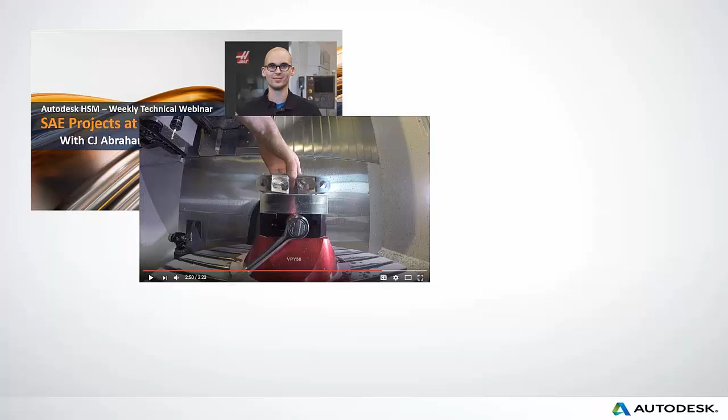A lot of the webinars started with CJ doing a QA session and answering questions people had, like how to set up the part and how he got some of the toolpaths working. He also joined us later on with other webinars and showed us different ways of doing work holding.

Here's his last presentation with us, a pretty cool assembly he did of that DMS machine at Pier 9.

If you haven't followed him on Instagram, I highly recommend checking out some of the projects he's worked on. Some pretty amazing setups he's done on the parts, and this is just scratching the surface.

CJ did an awesome job with us on our presentation, but one of the themes was how he did a lot of those setups. What were some of the questions on the soft jaws? How did he set up that part? We also had Tim Paul, an amazing machinist, join us.

He set up a lot of parts in Fusion and runs them. He joined us in a couple of our webinars as well to walk through how he sets up some parts.

He did the Matsuura belt buckle, which is amazing—I still want to get one of those. He had that set up on that Matsuura machine, as well as the bottle opener.

I still have one of these and use it all the time, but he did a great job setting that up, did some soft jaws, had it in a live demo, and was able to do it at demo days.

If you check out his Instagram channel as well, you'll see a lot of the setups he does every day, and check out some of his work there.

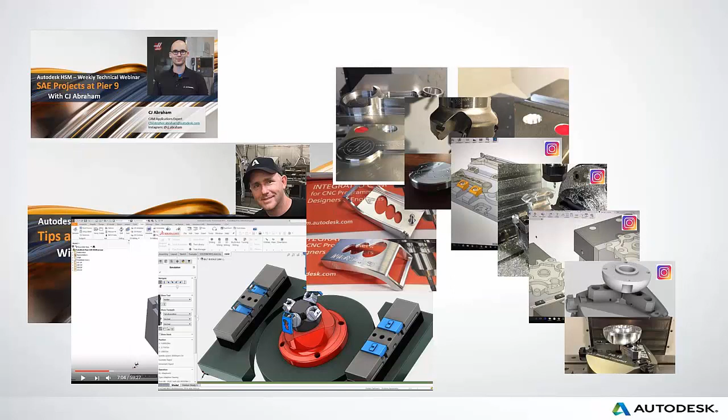It's just amazing. Another part of these webinars is the question of how you work with some of those models, and a lot of people have asked for those models to work with.

We had Angelo Juras join us in one of our webinars specifically to talk about setups and work holding, and he talked about some soft jaws.

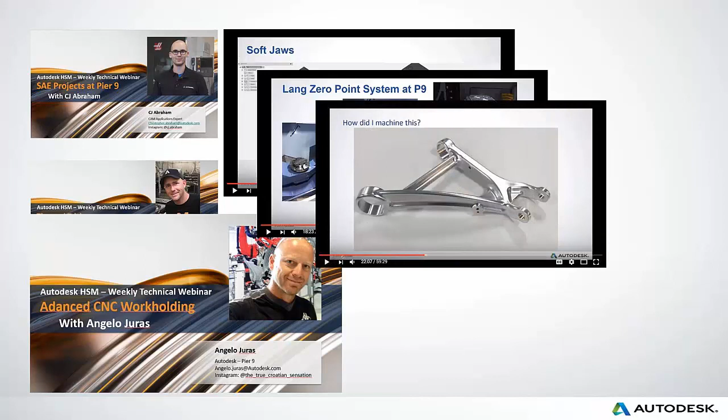He went through different ways he did setups to save time and make things much more efficient. For parts like this, how would you make something like that? He showed how he simply did it with just a few setups, used some tabs, and was able to do an amazing job setting it up.

Other parts he worked on looked like they'd be pressed parts, but he was able to machine them using specific setups he worked out on the machine.

Again, check out his YouTube channel and also his Instagram channel, and you'll see a lot of the setups he does daily as well.

So I'm just going through some of the webinars we've had in the past that were really focused on work holding, setup, and machine setup.

John Saunders joined us and walked us through some amazing points on what to look for if you're new to CNC machining or have a new machine, things to look for when setting up your parts.

We've also had Lawrence Winshank join us, and he was able to walk through some of the setups he uses on his machine.

Just a few weeks ago, Sunny McCullough was with us and talked about some of her curriculum and what she did to set up a custom handle for a vise, as well as how she teaches her students to make soft jaws before they move on to the next section in her class. So these are just a few that we've done, but a lot of them talk about work holding, tips and tricks that come from these experts and people who do it every day, power users and the Jedi Knights of working with Fusion and working with CAM.

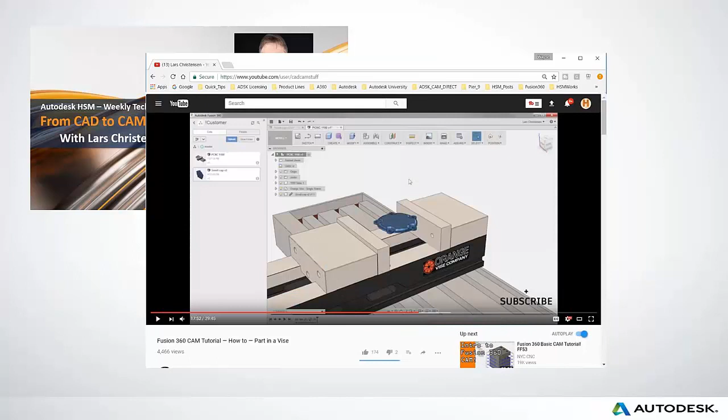Really good interface to learn. I highly recommend going to Lars's website and taking a look at some of these videos. Check out his YouTube channel as well. Check out his Instagram channel too, because he updates it almost daily with great tips and tricks on how to hold your parts, how to run those toolpaths, how to set up working on the Haas. Some really great tips on positioning and being able to get the toolpath efficiently to cut the parts you're looking for. So I highly recommend checking out his Instagram channel as well.

So a couple weeks ago we had Curtis Chan join us too, and we're talking about that Instagram community. We have some great users out there that show us daily what they're making and some of the amazing setups that they do. And we had Kurt on with Phil Butterworth, and Phil walked us through some amazing setups that he's worked on as well.

Before we get into that, I want to talk about the Instagram challenge that Kurt started — as he's connecting with that community on Instagram, he's also started the Fusion CAM Challenge this year, and it was all about work holding.

And I'd like to congratulate Makers Inc. for this amazing work holding submission that you did, which won. Really awesome way to set up a part, completely designed in Fusion, all the way through, design documented, all the way through to making the physical part. Congratulations, Makers Inc. They got an Orange Vise as well as the CarveSMART package and a free ticket to AU.

And runner-up was Phil Butterworth, who was also on this webinar with Kurt, and he did an amazing swing arm assembly, completely done in Fusion, all the way from the concept to design to being able to make the actual part.

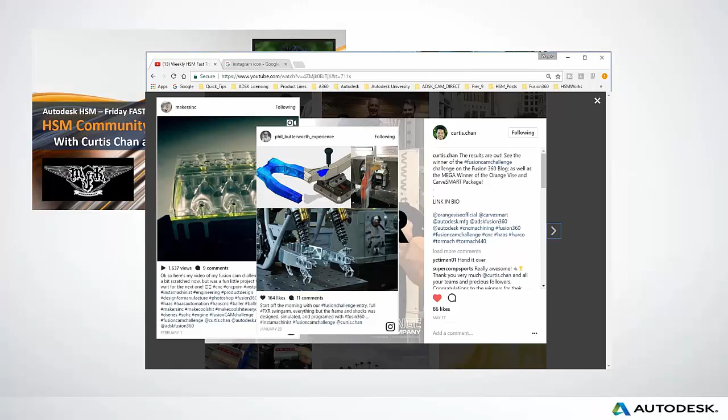Really awesome job. Third place was Regal Metalworks, who made this custom exhaust for a Porsche - amazing job producing those parts. Fourth place was Innovation Forge, who made some amazing woodworking fixtures as well.

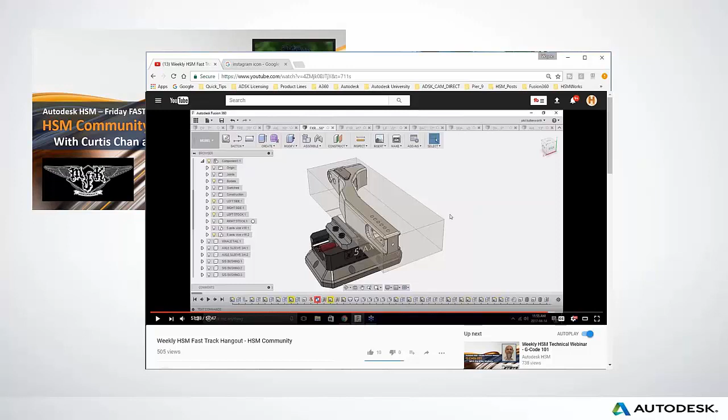Phil Butterworth was part of that webinar with Kurt, showing innovative ways he set up these parts to be made, including interesting ways to avoid collisions and get into tricky places on the parts. He gave great background on how he set up some parts using the dovetail to access all those different nooks and crannies in one setup.

And also some other custom setups to set up those parts. So I'd like to get started now, but I know there were a lot of new users asking how to set them up. So I'm going to take a Chick vise.

I'm going to download a Chick vise and upload it into Fusion. Once we get into Fusion, I'm going to turn it into an assembly where you can move the jaws back and forth.

Then I'm going to design a simple part - actually a sprocket with a hub, but we're mainly going to focus on the hub part. I just want to model it up quickly to show you how you can work with pockets using parameters to change them.

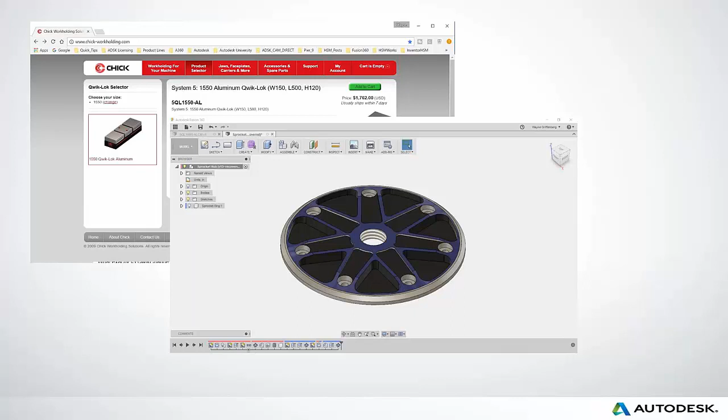Then we're going to bring that part into the vise, set up some soft jaws, and walk through those steps - hopefully this will be helpful for you, since I know there are a lot of users still learning these steps. So as we go through, please feel free to ask questions.

I know Matt Nichols is on with me - he can help answer some questions, and I'll do my best too. So I'm going to get started, bring up my Fusion and my web browser. I'm using Google Chrome, and I'm just going to go grab a Chick vise.

I'm going to search for my Chick vise - looks like I searched there earlier when I was practicing. I'll go into this Chick Work Holding Solutions page and download a Chick. Now you do have to sign in - I'm already signed in, but you create an account so you can download the different vises.

You can download Kurt vises, the Mitee-Bites, 5th Axis vises as well, and work holding fixtures. So I'm just going to walk through the Chick one today. I'm going to look for a product, get the Qwik-Lok, and use this 1550 today. I'll select the 1550, which enables me to download some files.

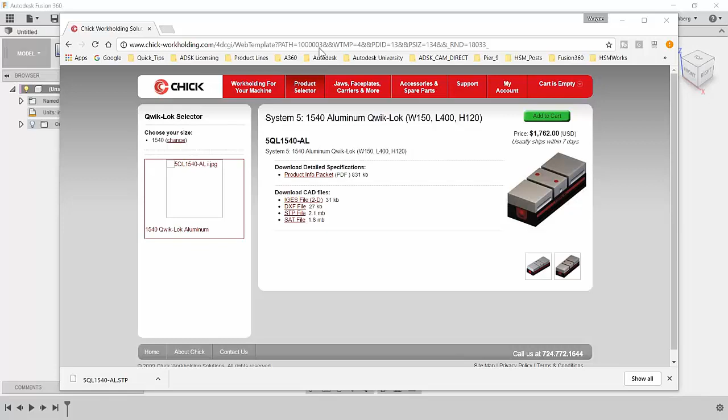I like to work with IGES or STEP - today I'm going to work with STEP, since it seems to work best when bringing it into Fusion to make an assembly. So I'm going to download the STEP file - takes just a second. And there it is, downloaded into my downloads folder for me to upload into Fusion.

So I'm going to go back into Fusion, into a project we're working on today - this Fast Track to CNC Programming folder. I'm going to go into this project and upload it there.

I'm going to click Upload and select the file. Now, some of you may not know, but there are a lot of different files you can upload into Fusion - native files, native SolidWorks files, STEP files, STLs, Rhino files, native Pro-E files, Parasolids, different binary files, IGES, CATIA native files, as well as Inventor files.

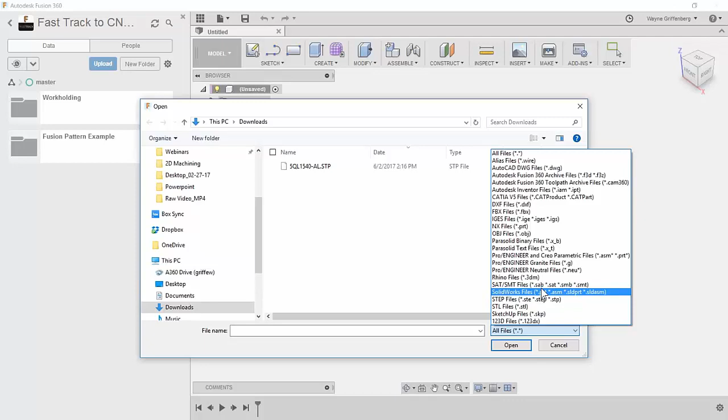So there are a lot of different files we can upload, especially native files. And just to let you know, if you upload a native file into Fusion, you can keep that original file, and if any changes happen to it, you can upload those changes into your design as well. So in this case, I'm going to open this STEP file and say upload.

And in the background, in the cloud, it's going to upload that file and translate it into a Fusion F3D file that we can work with. So as that uploads, I can close this out, and I can see the progress down here in the corner. So it looks like it uploaded. It's finishing the progress.

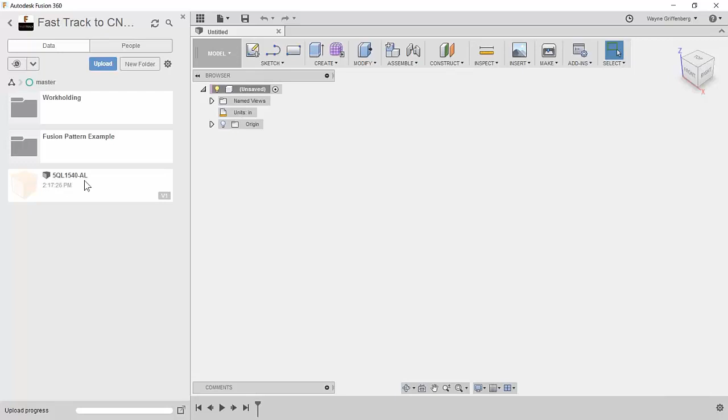So pretty quickly, I'm able to get a file in here, a version 1. It's now a Fusion file. So I'm going to open that up. Just going to right click and open it up into Fusion. Okay, so there's our Chick vise. It looks like it's in a different position than what I'd like. So I'd like to rotate it around. I want to have it in position as if it's in my machine.

So right now it brought in all these files. Now STEP files work pretty well in bringing in each of the components with its own origin and body. And that's pretty good. Sometimes you'll open up different files, even SolidWorks files or Pro-E files, and they just become standard bodies that make up the whole. And we can also work with that as well. But today it looks like the STEP file brings us different bodies that we can work with.

But I'm going to move them all at the same time. So I'm going to select some of these bodies. I'm going to move them. I'm going to hold Shift, and I'm going to grab the bottom one here in my browser. What I'd like to do is rotate this around so that its X, its Y, and Z match the way it's set up in my machine.

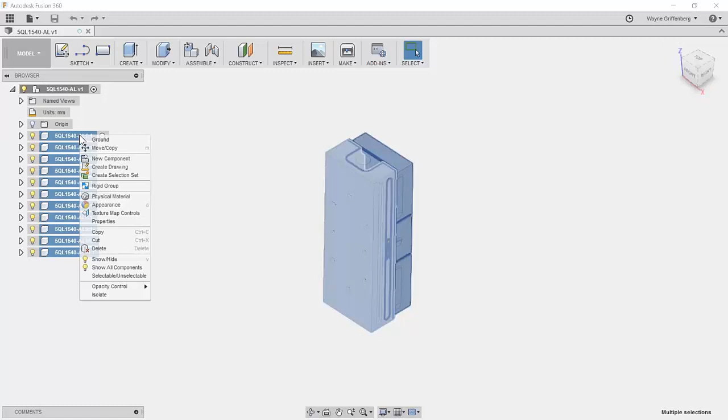So as I have it highlighted, I'm going to right-click on any of these files, and I'm going to say Move or Copy. So I have these handles where I can rotate the handles, or I can move it back and forth, or I can grab the origin and free move it. So I'm in the free move mode. What I want to do is grab this handle and flip it down this way, 90 degrees, so now it matches the way it's sitting in the machine in the Y and the X and Z. So my X is going along this plane, my Y is going up here, and my Z is straight up. I'm going to say OK.

Now one thing I noticed too, if I turn on the origin, it looks like the origin is on the bottom of the part, somewhere on the inside. What I'd like to do is get that origin to be at the very top of this plate right here. This is the fixed jaw plate. So I can move the part from the fixed jaw plate down. Now, actually let me change this over from millimeters to inches because today we're working in inches, so I don't forget.

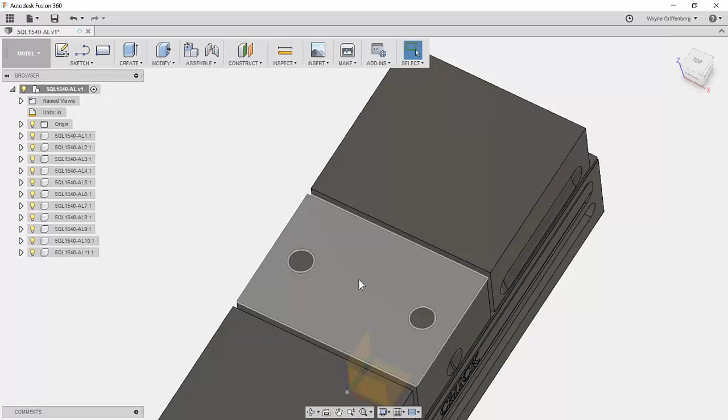So I'd like to move that, but right now I don't have any features on the top of this jaw. Normally I would like to have a dowel pin hole where I can come in and probe off and find that center and call that my G54. In this case, I don't really have anything there. I don't really have to draw anything. All I have to do is create a sketch on that face. Okay, I didn't do a create, so I'm going to right click, create a sketch on that face, but I don't have to add anything. I'm just going to stop sketch. Just a little bit of a tip.

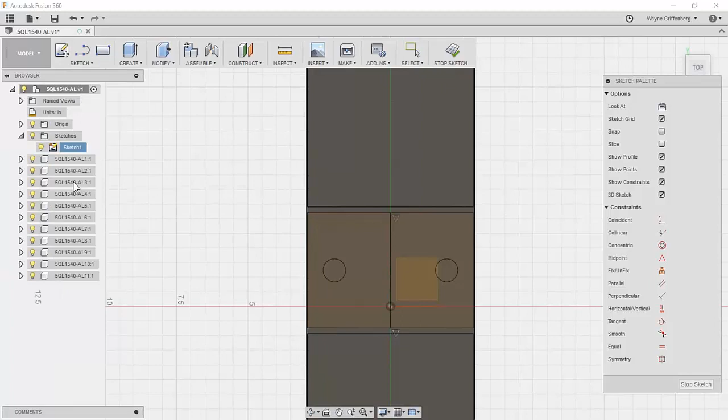Because I created a sketch and it found the boundary of the part, it also put a center on here somewhere, or it's making a liar out of me, but often you'll be able to find a center on that sketch. If not, I can also add a line going across to put a center on that sketch. Let's do that. So I'm going to edit that sketch real quick, and simply draw a line from the center here down to here, and then we'll have a midpoint of that line to hook to. Sometimes you can also sketch and put in a simple point right in the center. Now we can use that point to move this vise. Now that's just one quick way.

Sometimes I'll actually make a hole there, but sometimes you just have to put a sketch so you can move this around. Later on when we move it, we can get rid of that sketch too. So I want to move this part. I want to move it to that center point right there. So I'm going to grab all the bodies underneath it here, again holding shift, right click, go back into move, and this time I'm going to change it to move point to point.

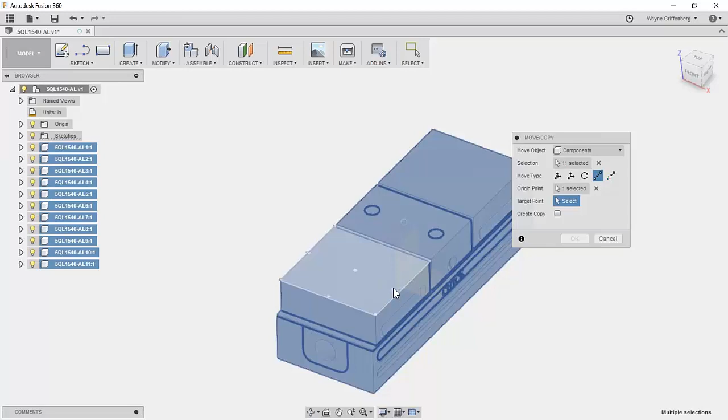And where do I want to move? I want to move this point to the origin. Now I can't quite grab the origin underneath of there. Sometimes it's a little bit hard. You can use a shift key. I'm going to expand down the origin and just simply click it here, and it moves it down to the origin. So you can actually grab the planes, or you can grab the axes or the origin right in the browser window. So it moved it down.

Okay, I don't really need that sketch anymore because now I'm going to be fixed in that position. So now what I'm going to do is I'm going to get rid of that sketch. Right click and just delete that sketch out. I don't need it anymore. Okay, so now what I want to do is I want to fix these components that are supposed to be fixed, the ones that don't move.

So I'm going to select those, holding Control. I'm going to select those components out of a list here on my browser. So I'm going to grab that plate, and down here, that's the fixed jaw. This is my moving jaw, my other moving jaw, and then I have these other fixtures of the labels as well. So those are the components that I don't want to move. I want to be able to move these moving jaws right here.

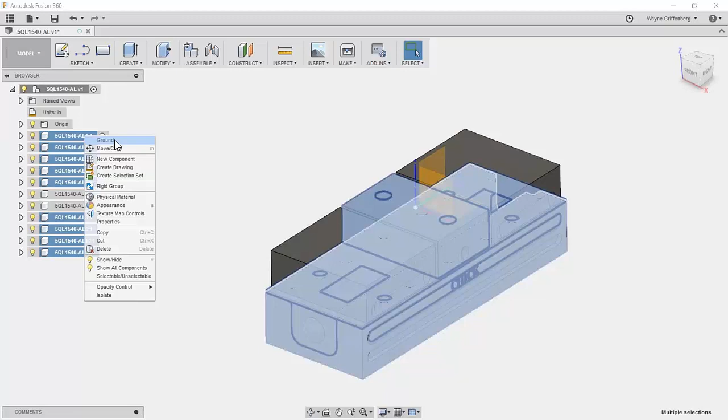So as I have those highlighted, I'm going to right click, and I'm just going to say ground. So now I have this push pin in all of those components. So now I grounded them, so now I'm free to be able to move these components, but I can't move those parts that are grounded. Okay, so I want these to move and slide as if they're on the actual jaw. So now what I want to do is I want to create some joints. So I'm going to go up to Assemble. I'm going to choose Joint.

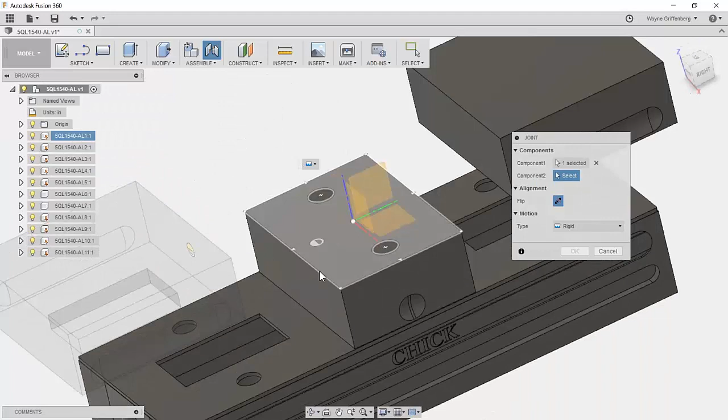Now joints, they are going to limit the axis of free movement, but they're also going to mimic the way things work in the real world. So I want to make a sliding face, a face-to-face slider joint between the center of this jaw and the center of my fixed jaw. So now when it goes into place, it makes a rigid joint. You saw it moving back and forth like it's going to lock it there. I'm just going to change that to become a slider joint.

Now if it was sliding in the wrong direction, I can easily change the axis of movement. So it says Z-axis because it's looking at it along the center. So there's a sliding joint on that side. I'm going to say OK. I want to repeat that same joint. I don't have to go up. I just right click, and I can go up and pick repeat joint. I'm going to select this center, and now it gives me that same sliding joint on the other side.

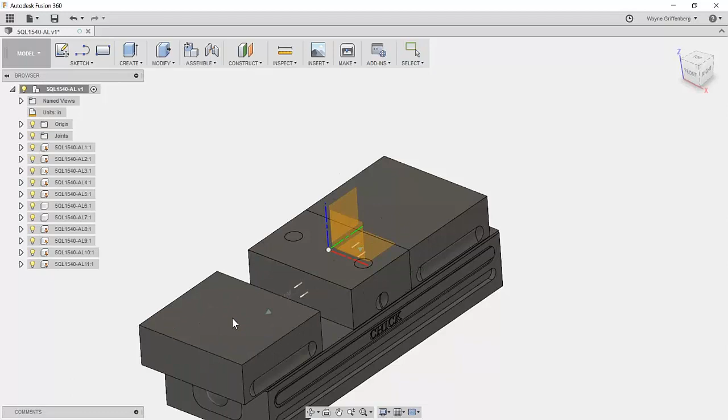Now you notice I'm able to slide them, but it also goes all the way through the model. So one way you can do is limit that. Now I know there's a lot of people who like to put in the actual screw movement. You can do that. You can do the assembly with a joint. You can also do it with a drive and motion link or drive joint. I'm just going to do a simple joint limit.

So if I expand down, you notice we now have this joints folder right here. So if I expand down, I can see my two slider joints. I'm going to right click on this slider joint, and I can go down to Edit Joint Limits. So now I can limit it as a minimum or a maximum. So if my minimum was 0, my maximum, let's say I want to make it 3 inches,

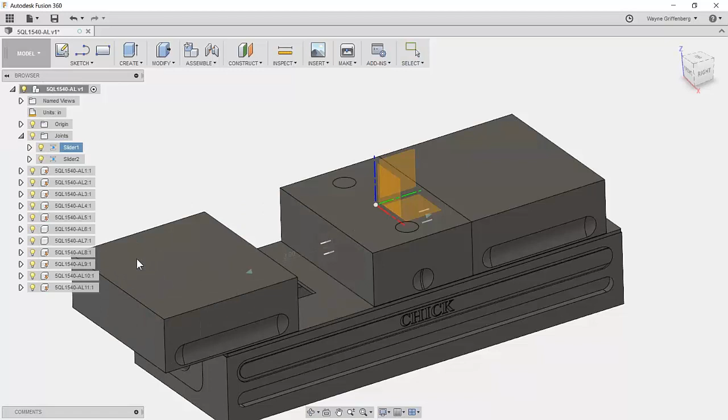Okay, and it locks it out 3 inches. So now I can slide this. When I slide it in, it goes to 0 and it goes out to 3 inches. So now I can lock it there in between 3 inches and 0. I could do the same thing on the other slider joint as well.

So I'm going to say my minimum 0 and my maximum will be 3 inches. Now I often like to lock it. If I know ahead of time how wide I want to make this, I'm going to put a block in here, and that's where I'm going to start my soft jaw. If I'm going to keep that 3 inches wide, I'm going to have a block. I'm going to lock that down. I would just simply make it my minimum and maximum will be 3 inches. And now it won't move out of that position. I'll do the same thing on this one here too.

So guys, I'm just kind of giving you some tips on the way I've learned to work with it. There's not only one way. You can use other types of joints. You can have other ways to set up your vise as well. And I'm just showing you some tips and things that I've learned as we go along with this webinar. So now I have that locked in space. I have it 3 inches on the open, and now I'm going to start to capture my design history.

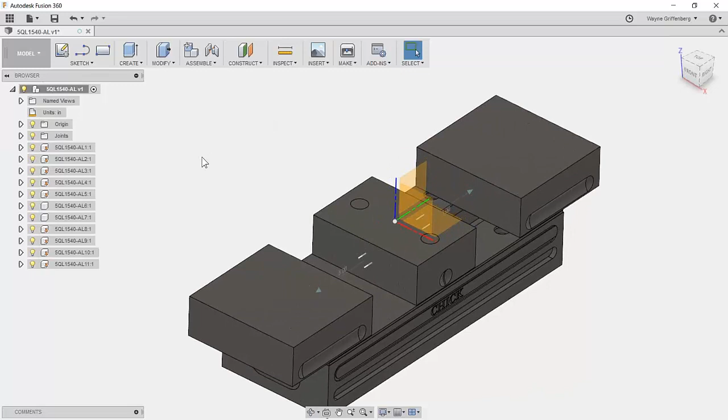So now that I set this up, I'm going to right-click on the actual main part itself. I'm going to go down and say Capture Design History. And now it captured the design history, and it also keeps down here the history of what I've done so far. When I've grounded those parts, when I've moved them, and I created those joints, they're all in the history in this group right here.

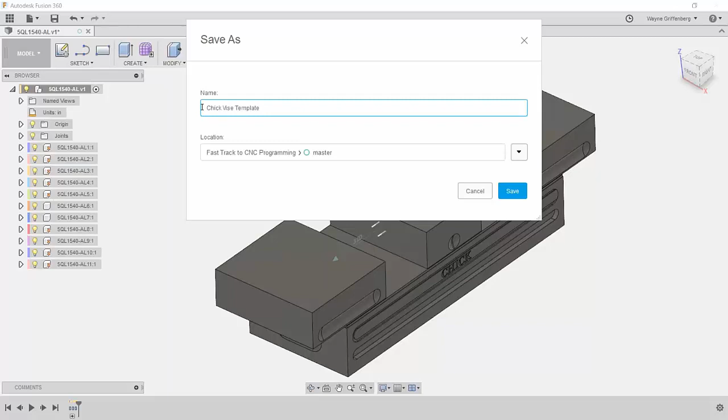Okay, so now what I'm going to do is I'm going to save it to that folder. I'm just going to go up to Save. It already knows the name. I'm going to do a Save As, actually. I'm going to go up to File, Save As, and I'm going to call it my Chick Vise template. Because now I can use it over and over again. I can open it up and then bring in a new part each time and make a new soft jaw out of it. So this is like a template of what I have sitting on the machine.

And it's a really powerful way to use this. It's a powerful CAD system. You might as well use it to its ability. So you might as well mimic what you have going on in the actual machine. And the closer you can mimic what's in the machine, the more accurate your programming is going to be. Okay, so let's create a quick part. Now I have a pencil sketch, or let's say a napkin sketch, of that sprocket, the actual hub of the sprocket that I'm going to make. So I'm going to go through and draw that up with you guys real quick.

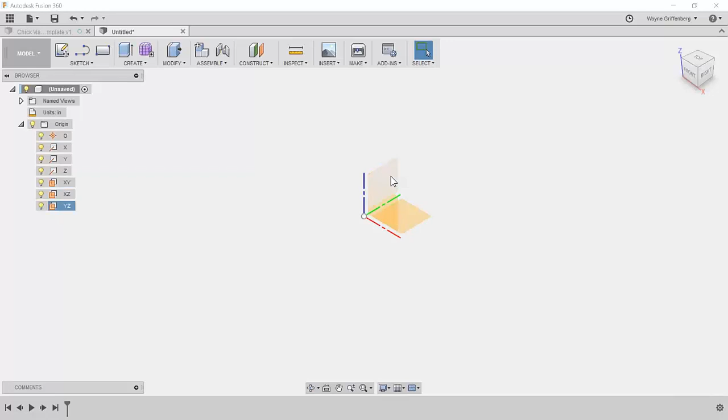So I'm going to go up to New Design. I still have my template in the background there. I'm going to expand down so I can see my origin. It's going to be a revolved part around the center, so I'm going to draw on the YZ plane. I'm going to create a sketch here and start drawing some lines that kind of represent the shape. So I can see my number line here, and I can see the dimensions, and I can plug in the dimensions directly. But I'm just going to kind of draw what I have on the sketch here real quick.

So it's about 6 inches in diameter, so I'm going to make it about 3 inches here. And I'm kind of just freehand drawing it as I go. This is actually going to be a part that looks like this. And when I snap to the origin, it snapped a constraint that keeps it parallel along with that X-plane. Okay, so now I have this region I'm going to work with. So I'm going to hit D for dimension, and I'm going to start to dimension my way around here. So this is going to be 3/4 of an inch. This is going to be 3 inches. This is going to be 1/4. There we go. This is going to be, let's see, 3/16.

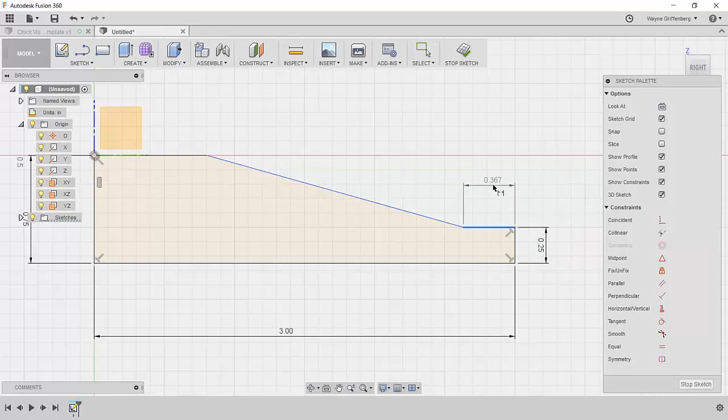And this up here is going to be 5/16. So now we have a constrained sketch. All my lines are now black. So now I want to revolve this around the center Z.

So I'm going to go up to Create. I'm going to create a revolve. I'm going to choose this region. And for my center axis, it's going to be the Z axis. And now I have this revolved body. So I made a quick revolve body. That's going to represent the base of the part.

In fact, this is going to be the simplified version of my part because I'm going to add some features in here. So what I want to do is capture that simplified version so I can use it when I'm setting up a soft jaw. So I'm going to go into the bodies here. I'm going to right-click on this body and copy it. Right-click on the folder of bodies, and I'm going to paste, and now I have a duplicate of the same body in the same position.

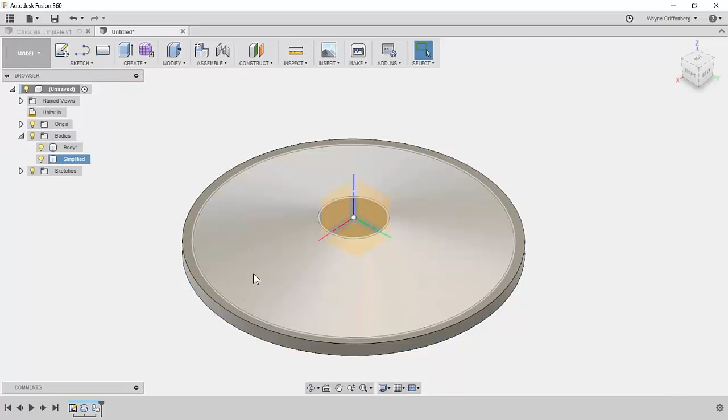What I'm going to do is I'm going to slow click. I'm going to call this one simplified. You can also, at this point, create a stock body, one that represents your stock if you're going to be a little oversized. For this webinar, I'm going to keep it as if this is my stock size, the overall width, as if it's already been turned down. But if you do, you can create an oversized stock part right here. Simply sketch it up, or you can expand this body out, make another copy, and then you can push-pull it and make it bigger.

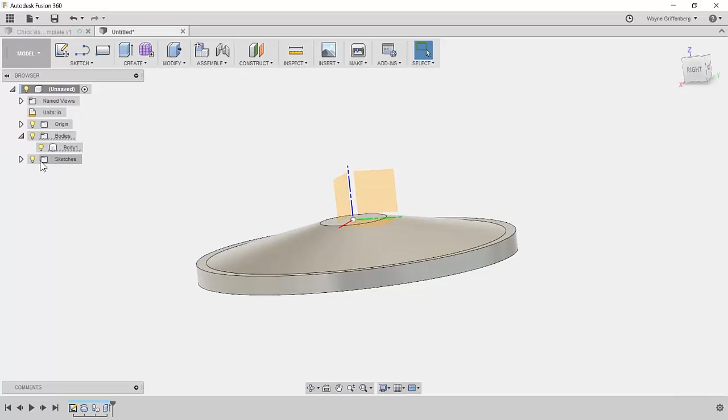In fact, my simplified part, underneath of here, I'm going to actually do an extrude real quick, and I'm going to pull this down, and I'm going to make it a tenth bigger, 100 thousandths bigger. Okay? So that's going to represent, when I flip it over, how much I'm going to remove off the part. So you can see, as I look at that body, where's my other body? Oh, let me undo. You know what I did? I think I joined it. So I'm going to do this.

Instead of doing an extrude, I'm going to modify. I'm going to hide this body, and I'm going to modify my simplified body and move it 100 thousandths down. So the last time I did that, when I did extrude, I joined it, and it joined all my bodies together. So you kind of have to be careful when you do that. So now I have a body that represents what the part's going to be, and I have a simplified body that's extended 100 thousandths lower. So I'm going to hide the simplified one and keep the regular main body on. And I also have that sketch that I can always go back to and edit.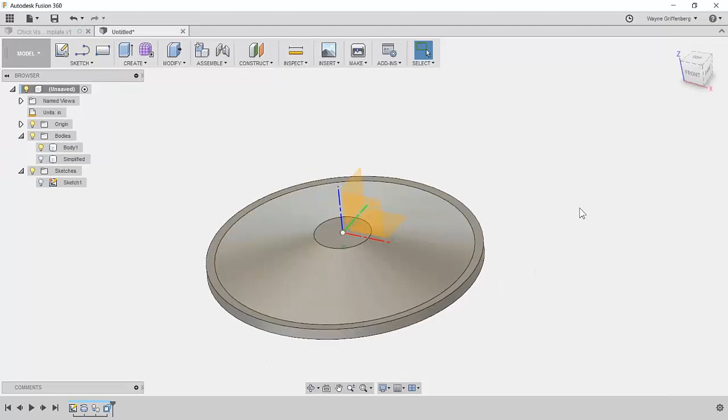Okay, so now I want to draw the features that are going to be on top, which is going to be the fingers or the spokes, if you will, of the hub. So I'm going to go in and start a sketch on this plane, my XY plane. Okay, I'm going to create a sketch. I'm going to hit C for circle, and I'm going to add some features in here, some circular features. So I'm plugging in the dimensions I have on my napkin sketch here.

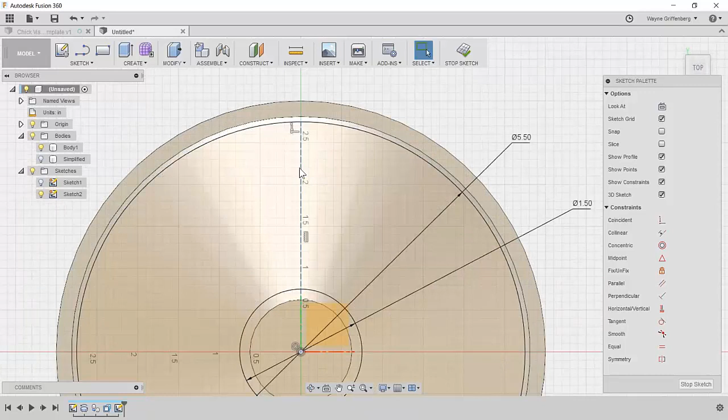And I want to get a center line on here, so I'm just going to hit L for line and grab a quick center line. I'm going to hit escape. I want that line to be construction, so I'm going to select it, and up here on my sketch palette I can change it to construction. Now I'm going to add the features for the end of the fingers. So I'm going to add a circle like this. Actually, I wanted to give it a dimension, so I'm going to undo real quick. Let's do it this way.

Circle, 0.75, it's going to be 3/4. And I'm going to do another circle, that's going to be a 1/2 inch. And I'm going to do one more circle, that's going to be a 1/4 inch for my through hole. Really simple. Now I'd like to have this point on the construction line and this edge to be coincident. So I just hold Control and select those two. I'm going to choose coincident, and now I have them coincident. So I'm going to draw one of the ribs of the fingers here. I'm just going to hit L for line.

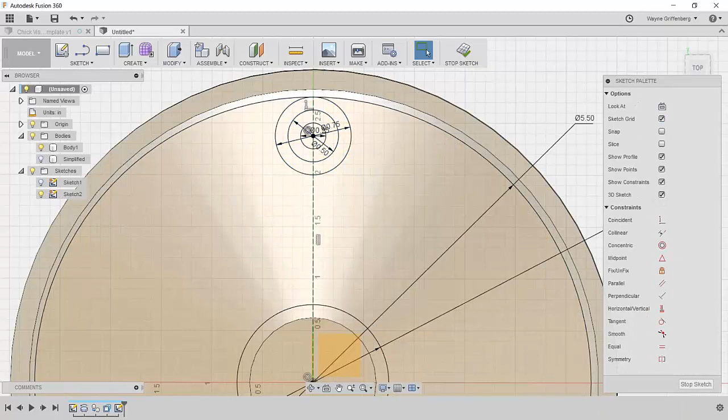A line. Oh, let me get out of that. Here we go. So I'm just going to kind of grab a line off of here and then just attach it to here. I didn't add any constraints yet. I'm just kind of selecting. Now if I move, you can start to see where it wants to create a parallel constraint. So I'm going to let it create the parallel constraint, so when one moves or one's angled, the other angle will follow with it.

And now I'm going to add some additional constraints, which I'm going to use tangent from here to here, and the same thing from here to here. So now I have tangency, and I want to lock them down. I want to make them constrained, so I'm going to add a dimension for angle. And that's going to be 3.5 degrees there.

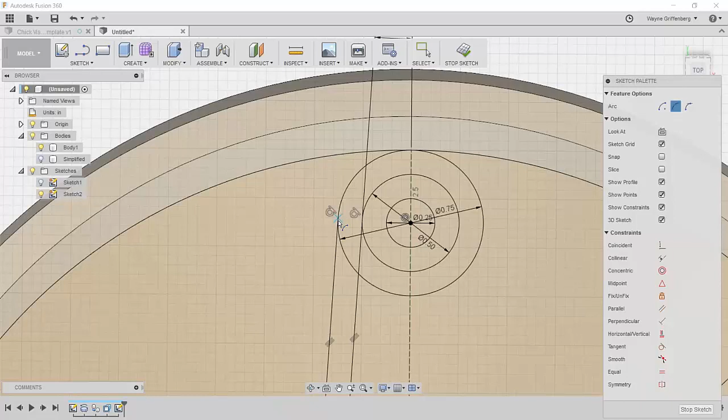And one more feature I want to add in here is an arc in here. Now I could do a fillet, but it's easier for me just to put an arc, a 3-point arc, right at the end point of where that line attaches there. I want to be able to start it there, and I want to grab it coincident to that line there. Now I want to make some tangency there, so I'm going to go up to tangent. I'll make this tangent with that, and this tangent with this line. So now it's going to take on whatever that dimension is going to be. That's an important piece on the next step I'm going to show you.

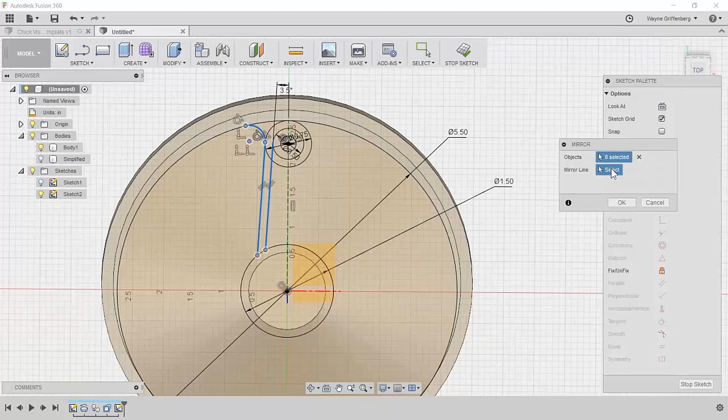So let me mirror this. So I'm going to go up to Sketch. I can actually grab a hold of these features that I want to mirror first. I just started a box from left to right, grabbed all the features including the constraints, and now I'm going to go up to Sketch. We're going to go down to Mirror, and it's asking me what do I want to mirror about because it already grabbed those elements. I want to mirror this middle line, and OK. And now I have these features and regions that you can see I can work with.

So I want to make a pattern of these going around, and now the actual hub that I'm making, it's a family part. So it could have 5 spokes, it could have 7 spokes. So I'd like to make that an intent in my design. So I'm going to choose to make a parameter. I'm going to call this parameter count, because I can use this parameter throughout my design. I'm going to give it no units, and let's say we start with 5. Okay? So now I have a user parameter called count.

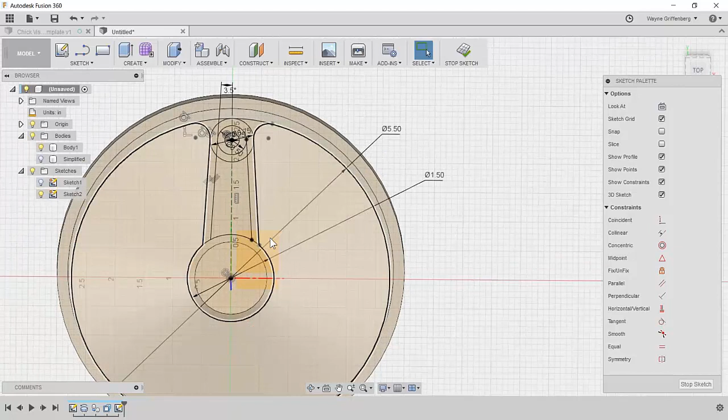So now what I want to do is I want to pattern these features as sketch features. Let me grab them all because I want to grab this edge too. So I'm going to grab all those features and I'm going to pattern that around. So I'm going to go up to Sketch, circular pattern. Where's my center point? It's there. By default it makes 3, but I want to change that quantity. I just start typing C and it remembered my count user parameter and it made it turn to 5. Okay. So now we have some features on here that I can start to put into this body.

So I'm going to stop that sketch. I'm just going to go to modify. I'm going to grab this region right here. I'm going to stretch that region down, let's say 700 thousandths. And when I enter it, my sketch goes away. So I just have to go over here and turn it back on and I can continue where I was.

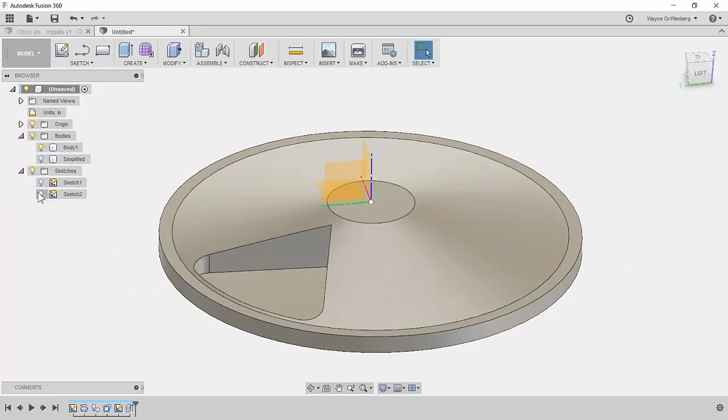I'll do the same thing. I'm going to modify this region and I want to be able to get this feature. I'm going to bring it down as the boss and I'm going to make that one go down, I'm sorry, 400 thousandths. And now I want to have this countersink in there as well. So I'm going to drag that down and we're going to go down 50, 60. Yeah, we'll go down 50 is fine. That's exactly what I have on my sketch. I'm going to say OK.

And now I want to be able to get that quarter hole through. So you can do it this way or you can use a hole feature. I'm just going to grab it and modify and drag this through. And I can also tell it I want the distance to go all the way through there. So now I could turn off this sketch and now I have these features. And I'd like to pattern those features. Now before I do, I want to put some fillets back in here so I can use a quarter or a half-inch bit in here.

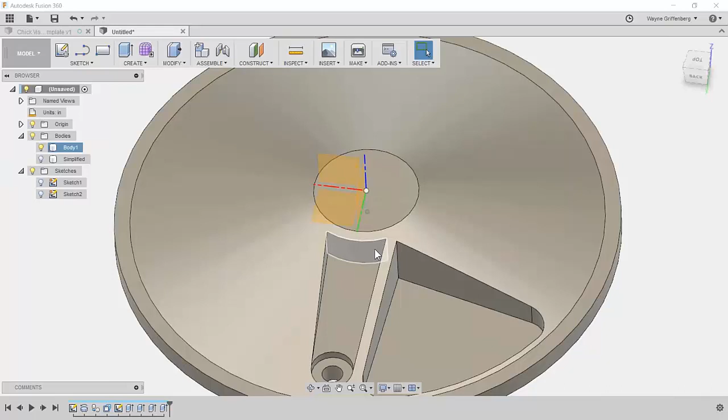I'm going to use a fillet, so I'm going to make them an 1/8 inch. I'm going to go up to modify. Let me cancel that for a second. I'm going to grab these edges right here into this edge, and start to pull it. I'm going to make that an 1/8 of an inch, and now I have an 1/8 of an inch fillet going around.

I want to pattern those features around. One quick way to do it, I can grab all these features, but I want to do this at one time. So I'm going to grab this feature, hold shift and grab the fillet feature, right click, and add them to a group. Now it'll make it easier for me to grab them all at one time, so I don't have to window select features since I already have them here.

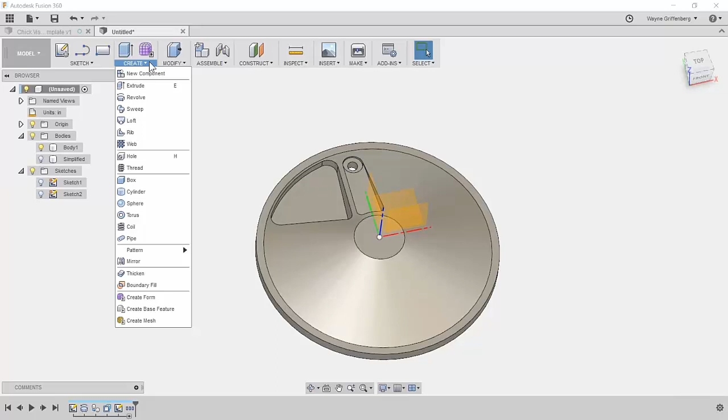So now if I want to create a pattern, let's do a circular pattern. I can just grab those features right here, select my axis, which is my z-axis. For the quantity, if I start typing C, there's my count, user parameter, and I could say OK. And now I have those features on here.

The cool thing about using that user parameter is now I can go up and modify that user parameter, and I can make that become, let's say, 6. It updates the model right away. I can make that become 7, and it updates the model. So now I have my family of parts in one part. I can make each of those in one part.

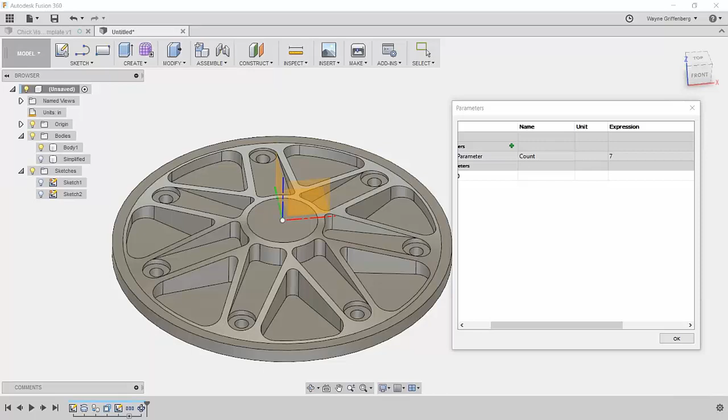Okay, so a couple more features I want to add.

I want to add a hole in the center and I want to chamfer this edge right here. So I'm going to add the chamfer, modify chamfer. Right here, I can pull it, press it. I want to make it an 1/8 of an inch, so I'm going to make that 0.125.

And then I want to add a hole in the center for the hub. I'm just going to say create, hole, choose that origin point. Selected my point, it's going to be a counterbore hole. My diameter of the hole is going to be 1 inch. My depth, I'm going to actually have this go all the way through, so I'm going to make sure it goes all the way through. And now for my counterbore depth, I want that to be an 1/8 of an inch, and for the diameter, it's 1 1/8 of an inch. Okay, so now I have that center hole.

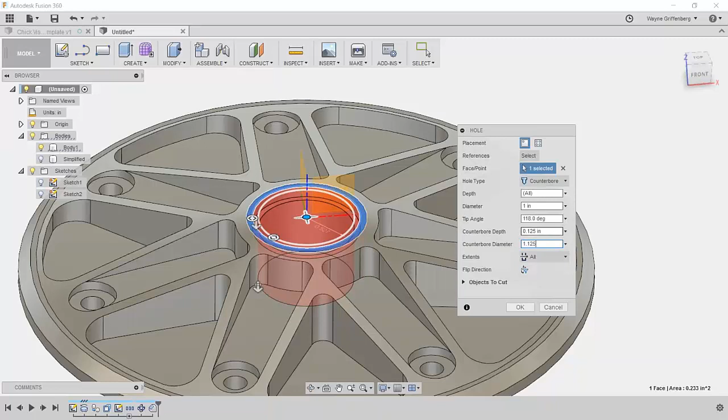I can add some threads to it. I could just go to create, thread, select the hole. It recognizes the size, and I have a choice if I want fine threads or not. So I'm going to do that, and I can also choose if I want them modeled, if I'm actually going to put a bolt in there. If I want to download it from McMaster Carr, I can actually put a bolt or rod in there, which I would check and make sure the threads are correct. In this case, I'm going to keep it not modeled because it'll keep my model lighter, so it won't take up that much more memory, because I'm not really going to do any analysis on the threads at this point.

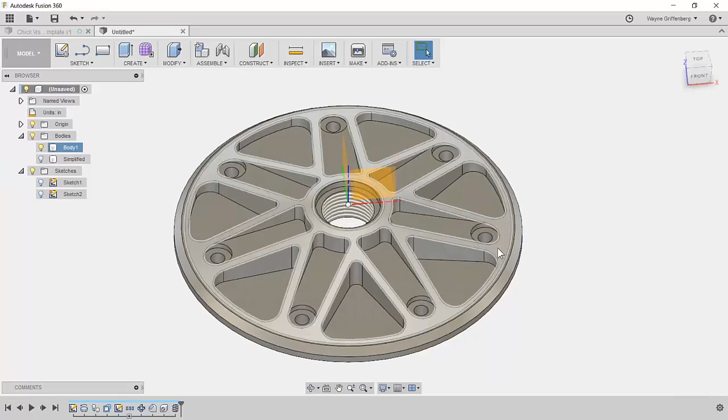So there we go, I'm going to make this part. So there's our hub for our sprocket. And now I want to be able to bring that into the assembly to be able to make it a soft jaw.

All right, so let me go up here and save this. I'll save it as my hub. Actually, I can call it the sprocket hub. Save it.

Now, I want to be able to use that simplified body when I go to set it up inside of the soft jaw. So I'm going to save it as the simplified body.

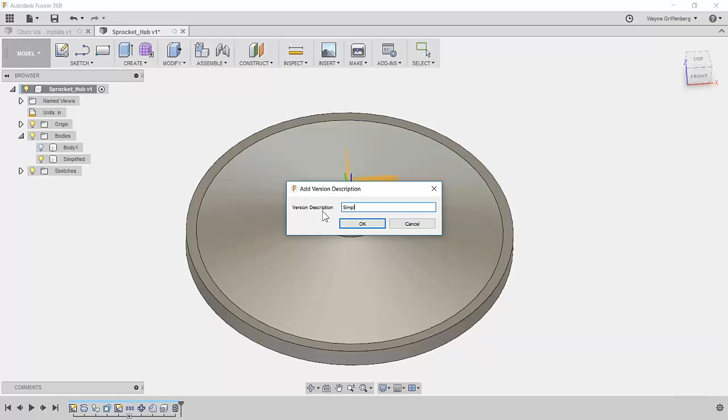Now, if you had your stock body, you can always turn that on too, and then you'll have your body that represents the stock model when you bring it in. So I'm going to go back over to this Chick vise, and now in my project, I can see I have that sprocket hub here.

So now we're going to bring that into this assembly. I'm going to right-click on the sprocket hub, and say Insert into Current Design. And now you'll see that sprocket hub is added to this current design. Since I set up my zero, I know where my zero is, I know where the top of the part is, and I know where the center of the vise is, so I could easily move this around.

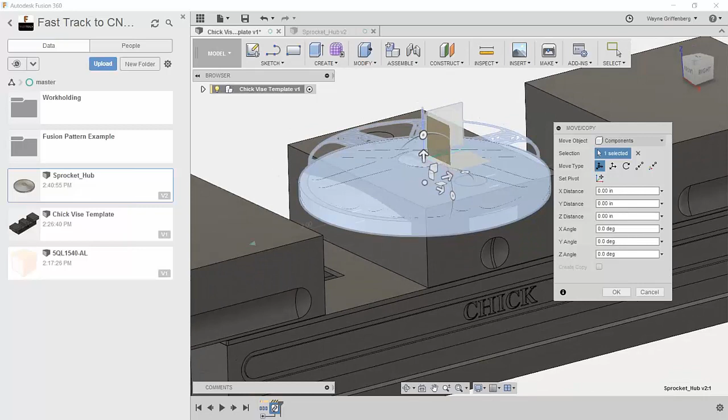Now, this isn't the best way, I should say. It's good to be able to lock down, use some constraints. Let me close out my hub real quick. But I'm just going to move it around in position. For this webinar, I'm going to move it up a little bit, leaving 200 thousandths on there.

So I'm going to grab this and stretch it over. I'm going to eyeball it to the center. I can also plug in the exact number as long as I know where the center of the part is, and I know where the center of my soft jaw is. I can really position that exactly where it needs to go.

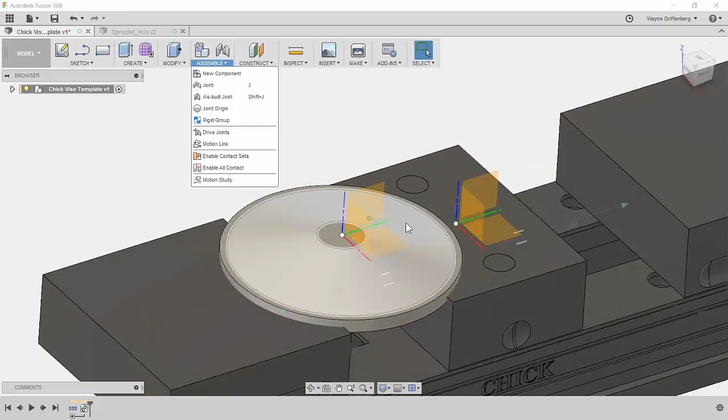So I'm able to get here pretty roughly. I'm going to say OK. And now I have that part in position, roughly placed where I want it. I can always go in here and add some assembly joints, and join it to the center. I can also have it go from the face down here. I probably would add some parallels in here, and mate it to those parallels as well. But for the sake of time of our webinar, I'm going to leave it the way it is.

Now, there's a couple ways you can do this to be able to get that diameter of the part into the soft jaws, or into the fixed jaw and the moving jaw. One of the ways we can do it is project sketches. So I can easily make a sketch on a plane, project that down, and cut away. Another quick way to do it is simply do what we used to call a Boolean remove. In this case, I'm going to do it as a combine.

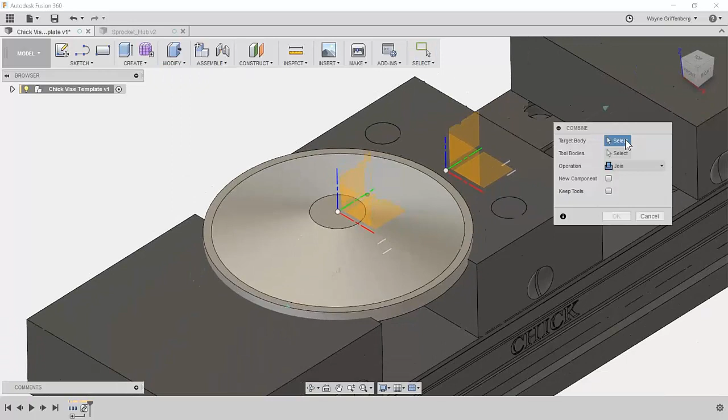So if I go to Modify, Combine, it's asking me what my target body is. I'm going to choose this fixed jaw. What's my tool body? It's going to be my model here. And it's saying I can join them or cut away. When I do, I get a preview of what it's going to look like after it's cut away. Okay, and so now that's been cut away.

I'm going to hold Alt so I can move it real quick out of position. And now I have that cut away matching the shape of the part. Now later on, we're going to find that if you have a stock that's oblong or even stock that's not quite right, it probably won't fit in there right. So we're going to add a sketch to add some relief in there.

But right now, I'm going to leave it the way it is. I'll do that same process again. I'm going to go to Modify, Combine. My target body is going to be this moving jaw. My tool body is going to be this body, and it's already going to cut it away, and I can see where it's going to cut that away.

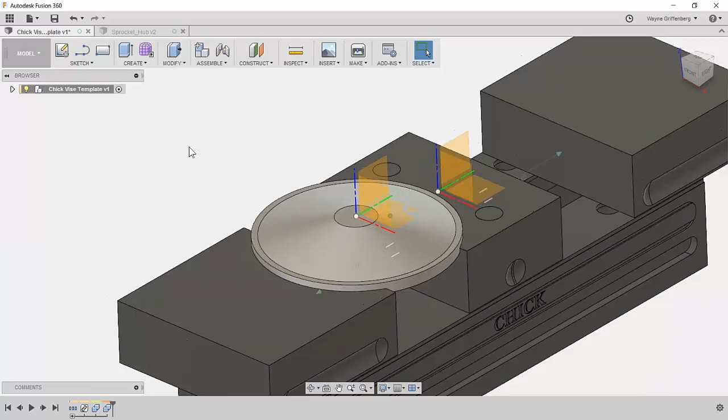So that takes care of the front end, and now I'd like to get my part back here, flip it over so I can get this face. So when I flip it over to the other side, even though it's going to have the features, it's still going to fit in that concave shape, or actually that angled shape.

So I'm going to go and make a duplicate of this same sprocket hub right here. I'm going to right-click, copy, okay, and I'm going to actually do that right here in my main body. I'm going to go to paste. And now I have a duplicate of that same part.

And it brings me to that same move window again. So I can move this over into relative position. If I know exactly how far they are from center to center, I can easily move that to that position. And now I'm going to grab a hold of this rotator right here. I'm going to flip it 180 degrees. Now if you want to flip it over the X, you can do that, but I flipped it over the Y. And now I want that to sit down there, 200 thousandths.

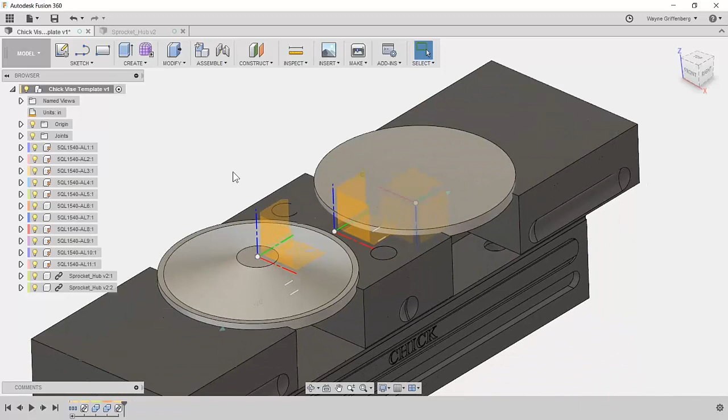Okay, and now I have that one in position. Let's take a look. I can turn these off.

Actually, I didn't make them soft jaws yet, so let's do the same thing. I'm going to go up to Modify, and down to Combine. My target body is going to be the fixed jaw. Tool body is this. I'm going to cut it away so you can see what it's going to look like.

Okay, we'll do it one more time. I'm going to right-click and repeat. This is my target body, my tool body. It's going to cut it away. So now, if I hide these, we can now see that we have what was left that matches the shape of the parts that we're working.

Okay guys, so let's go and set up some tool paths so we can cut out these features that we're trying to do in our soft jaw.

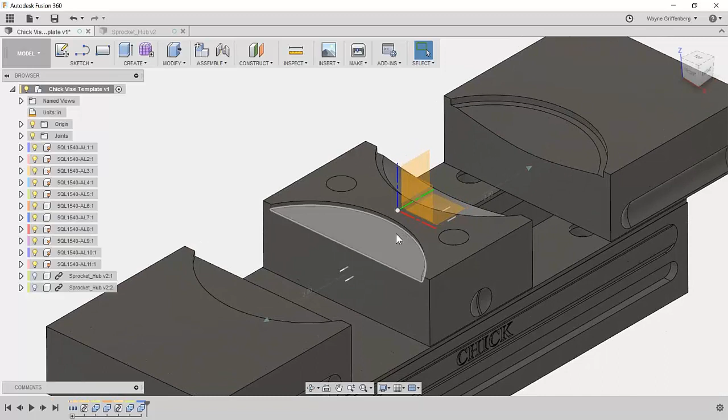Okay, so it looks like we have some time. Is there any questions so far about what I did in the walkthrough? I went through pretty quickly. Do you guys have any questions? Matt, is there any questions that might be coming in the panel?

Wayne, Al here, sorry I was a little late joining. You're doing a great job. Just one recommendation, there's a little bit of lag, so less use of the space mouse. Ah, gotcha. Thanks, Al.

So with this one, it's possible. I'm going to come back in and make a sketch, because often we like to sketch out here. I'm going to make a rectangle, because if the part is a little out of tolerance, you might not have it fit directly in there. So you can add a little bit of relief in there. We often like to add some relief so the part is able to fit a lot better.

Now this is just an example. Sometimes having a round edge on your soft jaw probably isn't the best way to keep it in, especially if you have parts that might be off tolerance or your stock may be irregular. So even having some rectangle in here with a V groove might be a good way to do it.

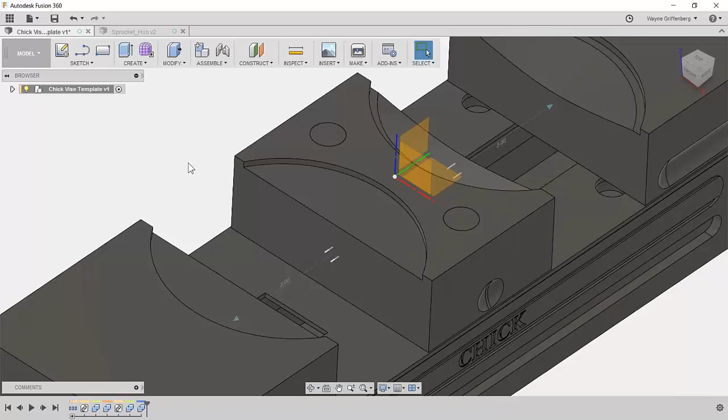So I'll add, there is a question in regards to tolerance from Nick. Often, and you're seeing a big gap on this Chick vise, which is commonly what you do in a Kurt or something like that. Chick, sometimes you'd have a far less of a gap. But nonetheless, usually when you create a soft jaw, you clamp something in to create a space.

One thing you definitely want to do is make sure you fit your part in the inside of the machined cavity before you loosen the jaw off and take that spacer out, because the jaw will shift a little bit side to side. So you want to definitely fit that part. You can use cutter compensation and comp it out, but just a little trick for that tolerance. Thanks, Al.

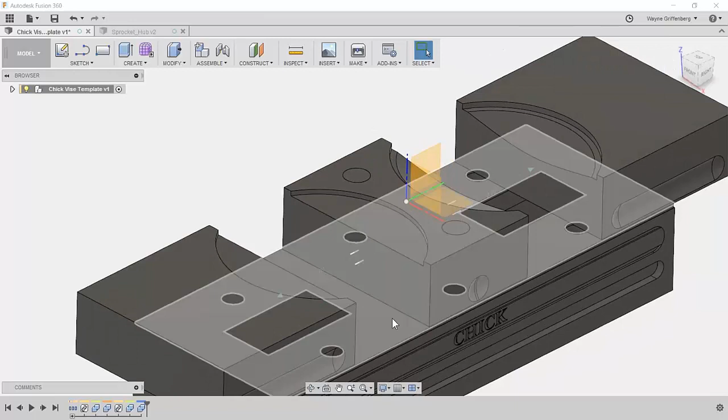So as Al mentioned, I could probably bring this a lot closer because I have all this room in that jaw to be able to hold it. And then a spacer would be in here. As Al said, you can put a smaller spacer and really make sure it fits in as you're working with those parts. So I'm going to add some tool paths just to show you what we would do to get some tool paths to cut those soft jaws really quickly.

So I'm going to switch over to our CAM workspace. Okay, so we have our setups here. We're able to work left to right to quickly and easily set up tool paths. So the first thing I want to do in this setup, right now we're working with those components that are already in this jaw here.

So what I'd like to do, sometimes I'll just grab those bodies that I'm working with, and you'll see it extend across. So even though it's showing us as if we have stock here, I'm going to put some boundary in here to make sure it doesn't try to cut inside of those areas. So I'm just going to grab those three so I can set up all those toolpaths at the same time.

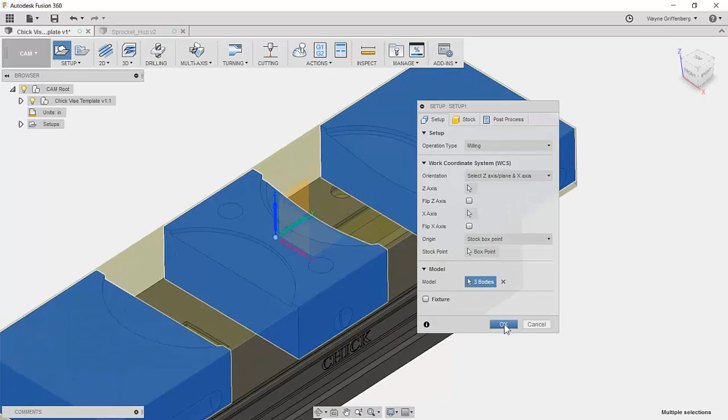Okay, if we're using a box point, we can also change and use that same selected point, so we're always using that same point in the top center of the fixed jaw. All right, so I'm not going to add any additional stock. We're just going to leave it as it is here. Let me go and change this, no additional stock.

Okay, so now what I want to do is I want to be able to get an adaptive in here. So by the way, I'm glad you did that, Wayne. I so often see people zero out X, Y, top, side, side, bottom, and not know about just clicking no additional stock. Thank you for bringing that up. Yeah, absolutely. It saves a lot of time and saves you a lot of grief on just being able to set that at zero additional.

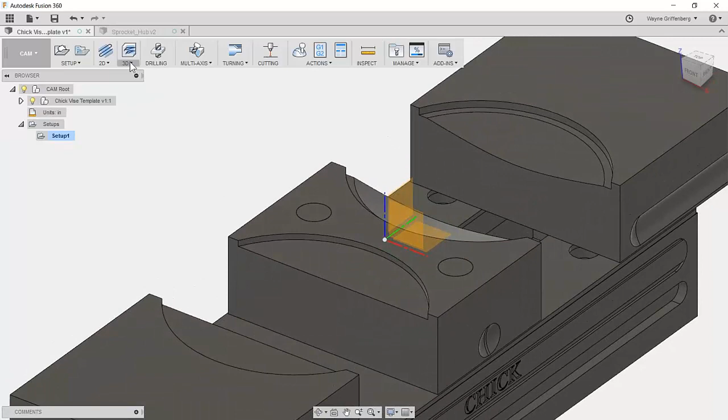So I'm going to go up and grab a 3D adaptive, and I'm going to rough these out with the 3D adaptive. So I'm going to grab a 1/2 inch flat that I think I have in here. If I don't, I can also filter down on the different types of tools that we're looking for. I can also filter by dimension. So if I'm looking for a 1/2 inch or a range between 1/2 inch and 3/4, I can plug that in there. I think I had one down here, but that's okay. We'll grab one out of the sample library. These are aluminum jaws, so I'm going to grab that.

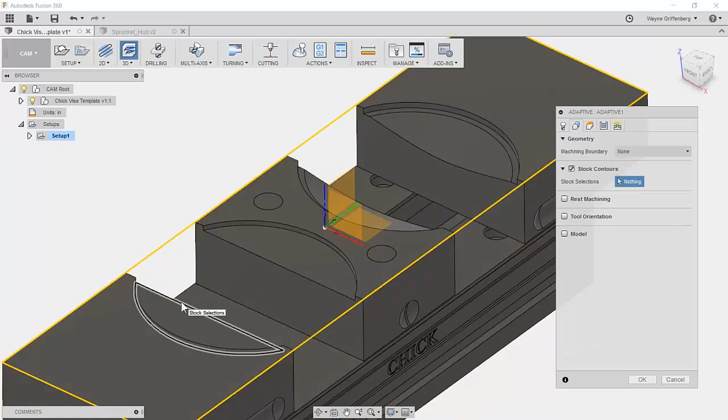Now, one thing in your geometry, when you're setting up a toolpath, the question that comes up is, what did you set as your boundary? Because if I let it go, it's going to fill in all that blank space. Now, I'd often just leave this as none. What I do want to do is change the stock boundary up top. I'm going to specifically select these edges right here as my stock boundary. I could do the same thing on here as well, because I'm just going to rough out that area. So a 3D adaptive is going to get into that area and work its way down.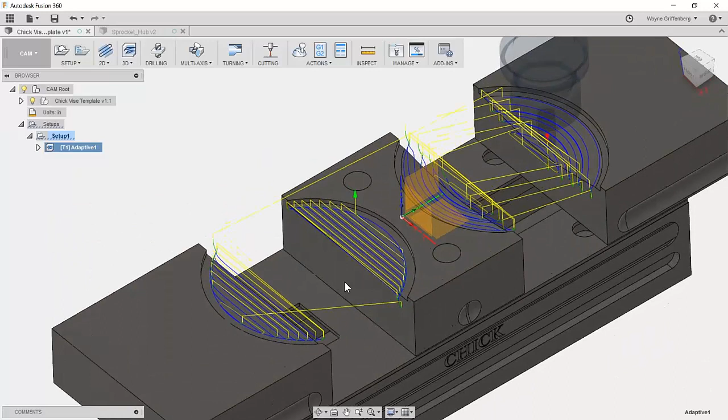Okay, so for my heights, I can set the bottom height where we need it, but I'm going to see if it's going to stay within that boundary. And I can also set up our passes, our optimal load to match the feeds and speeds of the tool, how much you want to stay constantly engaged with the material. So for now, I'm going to leave that the way it is. I'm going to leave some stock on there. Probably don't want to leave it on the walls, but that's okay. We're going to come back and finish it up. By setting those stock boundaries, it'll keep the tool in the areas I want, so it doesn't try to cut inside of that gap there. We told it specifically where we want that tool to stay.

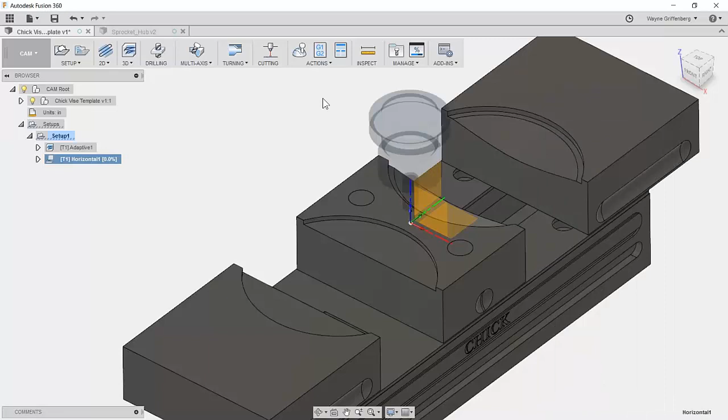Okay, so I'm going to follow up. I want to get all the horizontal areas, so I'm going to do a 3D horizontal. I can use the same flat mill. I probably would use a bullnose mill to do the roughing, but we're going to use that same flat because that's what I have in my machine right now. Now, the one thing about a horizontal toolpath, it's going to find all of the places wherever there's a flat face. So it finds its own containment. So I'm going to leave that the way it is for now, say OK, and let it find all those places on the part that I left stock where it's all flat.

You could set your step over. So we're cleaning up all those faces there. And now to get in this area right in here where we actually have that little tangent concave kind of shape right there from our part, I'm going to do a ramp. I like to do a 3D ramp. Sometimes you can do a radial, but in this case I'm going to do a 3D ramp to keep the tool engaged.

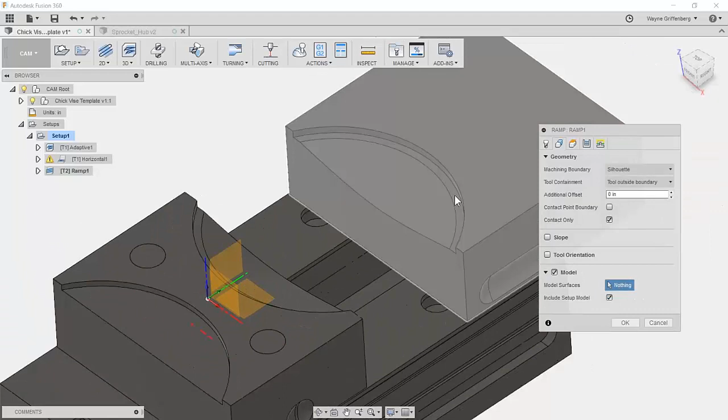And again, we can do the same thing. I'm going to switch out to a ball mill. So I'm going to change, and I'm going to filter down on ball mills. It's already filtering on my 1/2 inch, so I'm going to use my 1/2 inch ball. Okay, the same thing in here. I can tell it what silhouette we want to use, containment. So I can also do this. I can tell it on the model, what surfaces do I want to stay on? I'm going to select this surface and this surface. That's where I want to keep the tool engaged.

Okay, let's see how that looks. So sometimes you want to do that. Set up your toolpath, see what you get. Select an area or select the surfaces you want to keep the tool, let it go, see what you get. It's calculating for a while because I probably didn't set my boundary correct.

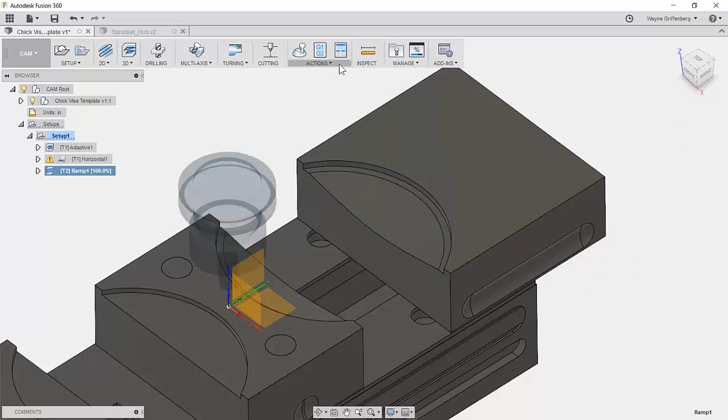It's fine. So yeah, there's a couple types of strategies you could use here. In this case, it's machining way down. It is. The other option I'm seeing comments on is you could just completely relieve that area and not even reference on that for your soft jaw. That's true. That would be a design decision, though. Yeah, if I do set a boundary, I can set it this way, and therefore I'm going to keep the tool within those boundaries as well. That's one way to do it as well.

So there are a lot of ways to approach it, a lot of different types of toolpath strategies. As Al had mentioned, we could always take that void out and leave that area so you're able to go in there and clamp down. So I was able to use the simplified version of the part to be able to get that area in here. So if we go back into the model workspace, I'm going to turn the part back on. So that's our simplified part there.

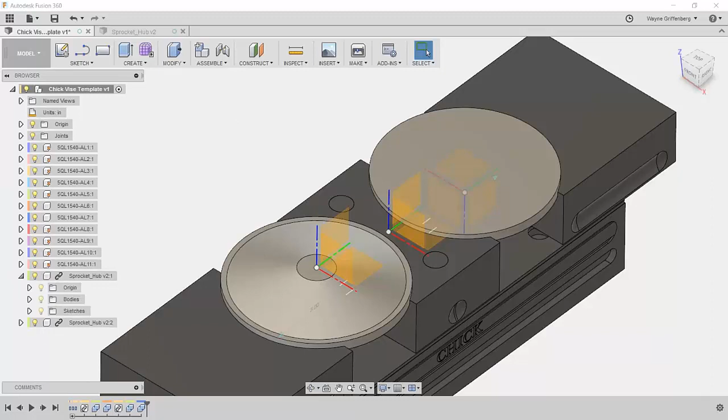Now, to get it today, unless we bring that part directly in here, we can right-click and we can break the link. Then we're able to work with the sub-bodies and the components in the sketches. But since we're a linked part, they're controlled in the actual part itself. So for today, and I think our team's working on being able to make it so you can control some of the visibility of some of these aspects, they're going to switch it to the main body and turn it back to the simplified body. Or turn off the simplified body and have the main body and save it.

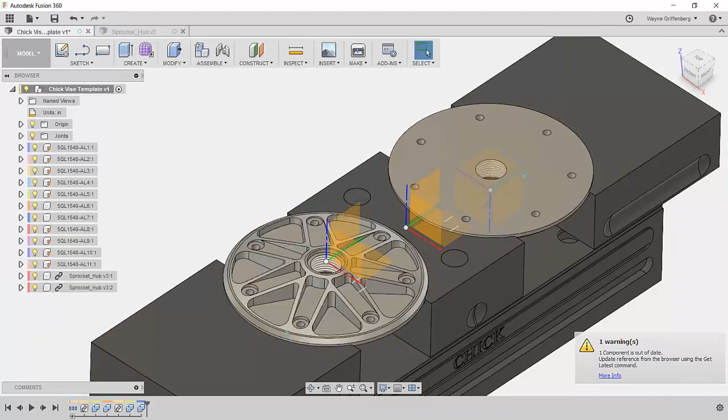Now if we go back, we can see an update has happened in our assembly. So I'm just going to go in here and choose to accept the update. Okay, and there's our part. So in the CAM, we can update and generate our toolpaths. We have the soft jaws ready, and we save this in a folder called soft jaws. And now I would start a new setup. There's my horizontal. I can start a new folder here, a new setup to start working on this part. I can choose the same.

Now, I'm realizing we're really close to the time before we start getting into this part, but I can do my setup the same way. I can start setting up this part to be able to cut it out. I can change my stock to be that stock body that we create. I can also change my point, so I want to use that same selected point, so we're always using that same dowel pin hole or the type of pin hole that you have in the center of the fixed jaw. So you're always pointing back to that same center. It makes it easier to program.

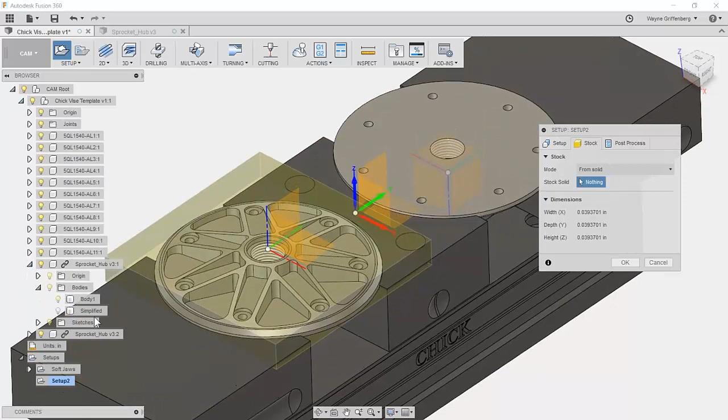And again, if I wanted to use that simplified model as my stock, I can always go down here and choose from solid, expand this down, go into that body here, and I can use that simplified body to represent the stock that we're starting with.

So if you have a body that you generate in the model, you can always select that right out of the browser tree right here to be able to set your stock that way. All right, so then I would start to machine the part. So that's one way to set up some soft jaws.

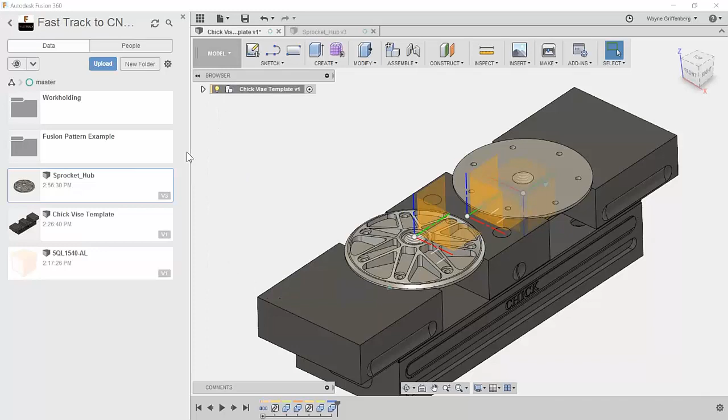So we're able to download a Chick assembly or Chick model right from the website. We're able to upload it directly into our project. I was able to show you how to go into the model view to change this into an assembly with joints where you can move the jaws back and forth. We're able to insert the simplified version of our part into here to be able to make the soft jaws from.

Then we're able to go back and change the part to be able to start to do the toolpaths on. And of course, the fun part I like is if I go back to the sprocket and modify that parameter and say we want 5 fingers on there, save the model. Now I have a completely different part family that I'm machining. And now if I go back into here, do the update, you'll see it'll switch, and then we'll have our toolpaths that'll update for the 5-finger version.

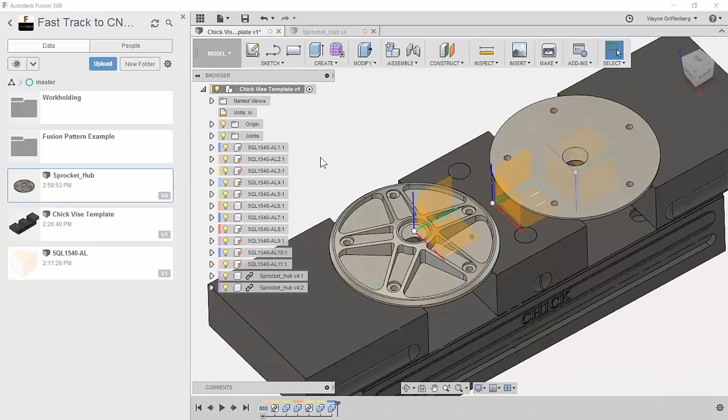So really quick, Wayne, a couple tool library questions we should maybe hit on before the end of the webinar. Sure. The first one was from Tom. He's wondering about how to not have all the libraries show up. So if you can maybe just go into CAM, go to the library and show how you can choose what libraries are displayed. Yeah, sure. Right up here, you can turn on and choose and turn off. So let's say we don't want the cloud library showing up or sample libraries, we can turn them off here, and we will be left with these libraries when we go back to our regular view.

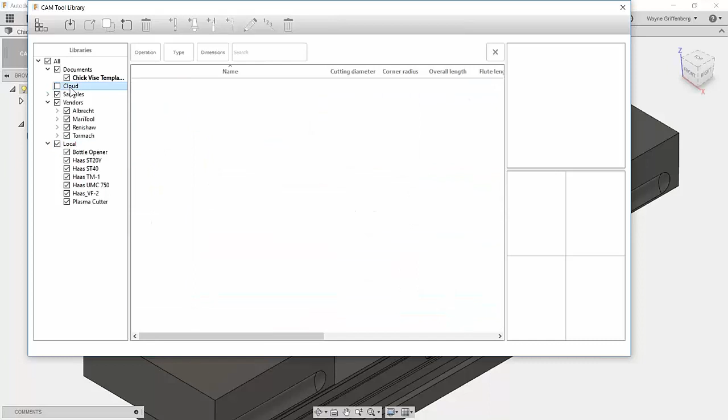So while you're here, it's ironic you turned off cloud libraries because the next question had to do with cloud libraries. So cloud libraries, when that's enabled, you'll have an asset library folder in your project, and then anybody that's part of the same hub will have access to that. So if you're on multiple computers, you'll have access to any libraries in there, and if you have multiple students, in the case, Stephen, for you, they'd have access. We just need to get set up as a team hub. I'll see if I can find some good details on how a class would get set up that way.

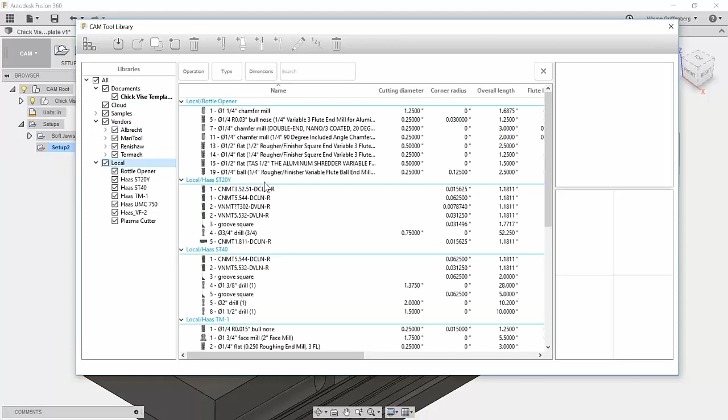Cool. So I hope that helps, being able to show how we can turn off certain libraries in this view. And when you turn it off, go back to your main library, and now you'll be able to search and use only those specific libraries that you choose. Cool.

All right, so that was the basics, being able to go in and get a vise and be able to download it, upload it, make a part, put it in there. It's a super fast way to be able to do it. There's a lot of ways to skin that cat, to be able to set up your models, but hopefully this was helpful to give you a good start to see ways that we can work inside of Fusion to bring models of many different types, use them, and quickly get your parts on your machine.

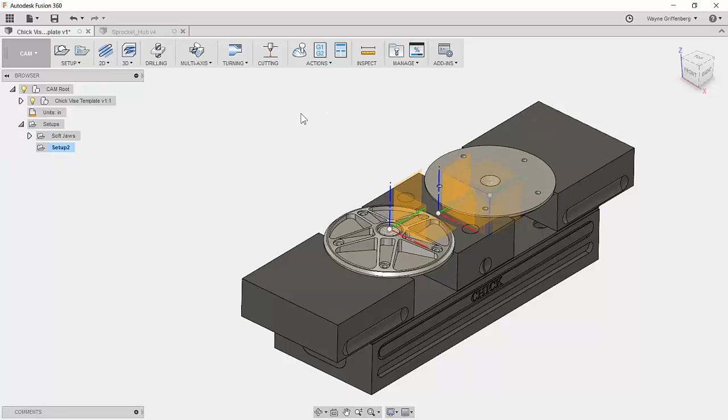All right, guys. Al, do you have anything that you'd like to add on working with soft jaws? No, I think you did a great job, and I think the biggest thing, whether it's soft jaws or anything, you did a good job showing how you can use your model, use different solids of the model to be useful in designing your fixturing. It's often forgotten, and a lot of times people think of integrated CAD/CAM as simply a way of having access to the design, but designing your manufacturing process and using the CAD side to streamline that is a very important part of machining. So I think you did a great job highlighting that. Thanks, Al.